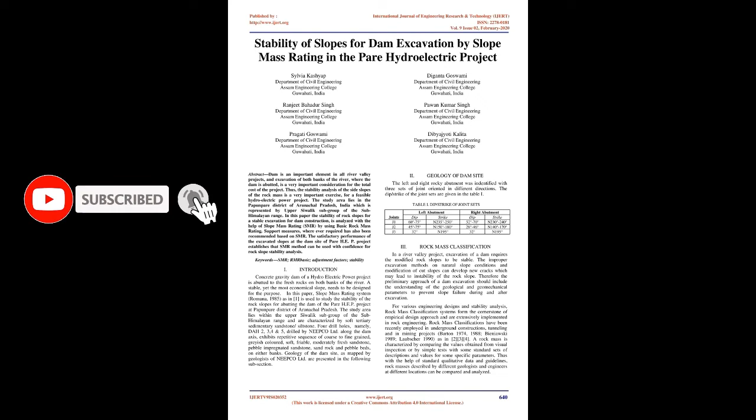Introduction. Concrete gravity dam of a hydroelectric power project is abutted to the fresh rocks on both banks of the river. A stable, yet the most economical slope, needs to be designed for the purpose. In this paper, Slope Mass Rating System, Romana, 1985, as in 1, is used to study the stability of the rock slopes for abutting the dam of the Pare HEP project at Papumpare district of Arunachal Pradesh.

The study area lies within the Upper Siwalik subgroup of the Sub-Himalayan range and is characterized by soft tertiary sedimentary sandstone/siltstone. 4 drill holes, namely 2, 3, 4 and 5, drilled by NEEPCO Limited along the dam axis, exhibit repetitive sequence of coarse to fine-grained, grayish-colored, soft, friable, moderately fresh sandstone, pebble-impregnated sandstone, sand rock and pebble beds, on either banks. Geology of the dam site, as mapped by geologists of NEEPCO Limited, is presented in the following subsection.

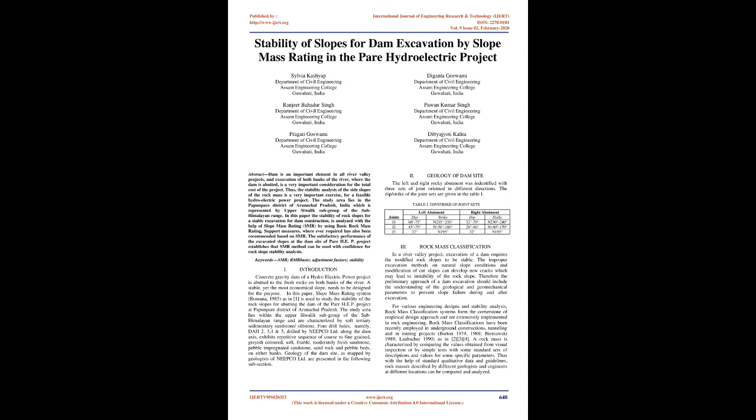2. Geology of dam site. The left and right rocky abutment was identified with 3 sets of joints oriented in different directions. The dip/strike of the joint sets are given in Table I. Table I: dip/strike of joint sets. Left abutment. Right abutment.

3. Rock mass classification. In a river valley project, excavation of a dam requires the modified rock slopes to be stable. The improper excavation methods on natural slope conditions and modification of cut slopes can develop new cracks which may lead to instability of the rock slope. Therefore, the preliminary approach of a dam excavation should include the understanding of the geological and geomechanical parameters to prevent slope failure during and after excavation.

For various engineering designs and stability analysis, rock mass classification systems form the cornerstone of empirical design approach and are extensively implemented in rock engineering. Rock mass classifications have been recently employed in underground constructions, tunneling and in mining projects. Barton 1974, 1988, Bieniawski 1989, Laubscher 1990, as in 2, 3, 4.

A rock mass is characterized by comparing the values obtained from visual inspection or by simple tests with some standard sets of descriptions and values for some specific parameters. Thus, with the help of standard qualitative data and guidelines, rock masses described by different geologists and engineers at different locations can be compared and analyzed.

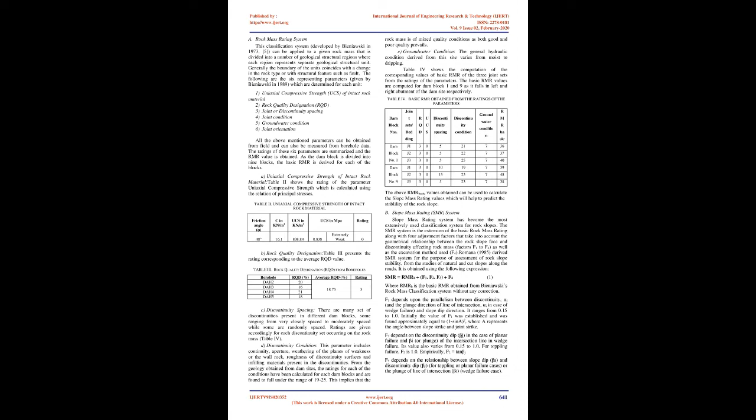1. Uniaxial compressive strength, UCS, of intact rock material. 2. Rock quality designation, RQD. 3. Joint or discontinuity spacing. 4. Joint condition. 5. Groundwater condition. 6. Joint orientation. All the above mentioned parameters can be obtained from field and can also be measured from borehole data. The ratings of these 6 parameters are summarized and the RMR value is obtained. As the dam block is divided into 9 blocks, the basic RMR is derived for each of the blocks.

A. Uniaxial compressive strength of intact rock material. Table 2 shows the rating of the parameter uniaxial compressive strength, which is calculated using the relation of principal stresses. C. Discontinuity spacing. There are many sets of discontinuities present in different dam blocks, some ranging from very closely spaced to moderately spaced while some are randomly spaced. Ratings are given accordingly for each discontinuity set occurring on the rock mass, Table 4.

D. Discontinuity condition. This parameter includes continuity, aperture, weathering of the planes of weakness or the wall rock, roughness of discontinuity surfaces and infilling materials present in the discontinuities. From the geology obtained from dam sites, the ratings for each of the conditions have been calculated for each dam block and are found to fall under the range of 19 to 25.

This implies that the rock mass is of mixed quality conditions, as both good and poor quality prevails. E. Groundwater condition. The general hydraulic condition derived from this site varies from moist to dripping.

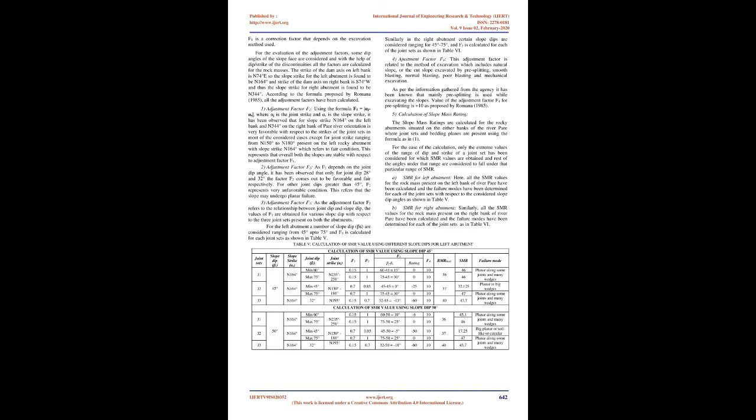Romana, 1985, derived SMR system for the purpose of assessment of rock slope stability, from the studies of natural and cut slopes along the roads. It is obtained using the following expression. SMR equals RMRB plus (F1 × F2 × F3) plus F4, (1). Where RMRB is the basic RMR obtained from Bieniawski's rock mass classification system without any correction.

F1 depends upon the parallelism between discontinuity, αj, and the plunge direction of line of intersection, αi in case of wedge failure, and slope dip direction. It ranges from 0.15 to 1.0. Initially the value of F1 was established and was found approximately equal to (1 − sin A)², where A represents the angle between slope strike and joint strike.

F2 depends on the discontinuity dip, βj, in the case of planar failure, and βi, or plunge, of the intersection line in wedge failure. Its value also varies from 0.15 to 1.0. For toppling failure, F2 is 1.0. Empirically, F2 equals tan² βj. F3 depends on the relationship between slope dip, βs, and discontinuity dip, βj, for toppling or planar failure cases, or the plunge of line of intersection, βi, wedge failure case.

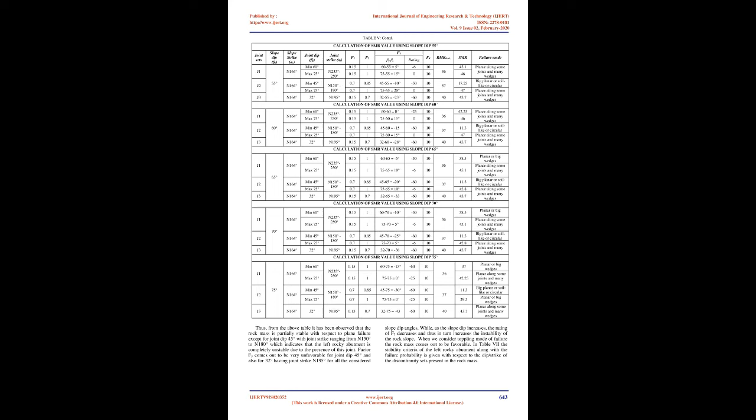1. Adjustment factor F1, using the formula F1 equals αj − αs, where αj is the joint strike and αs is the slope strike, it has been observed that for slope strike north 164 degrees on the left bank and north 344 degrees on the right bank of Pare River, orientation is very favorable with respect to the strikes of the joint sets in most of the considered cases, except for joint strike ranging from north 150 degrees to north 180 degrees present on the left rocky abutment, with slope strike north 164 degrees, which refers to fair condition. This represents that overall both the slopes are stable with respect to adjustment factor F1.

2. Adjustment factor F2, as F2 depends on the joint dip angle, it has been observed that only for joint dip 28 degrees and 32 degrees the factor F2 comes out to be favorable and fair respectively. For other joint dips greater than 45 degrees, F2 represents very unfavorable condition. This refers that the slope may undergo planar failure.

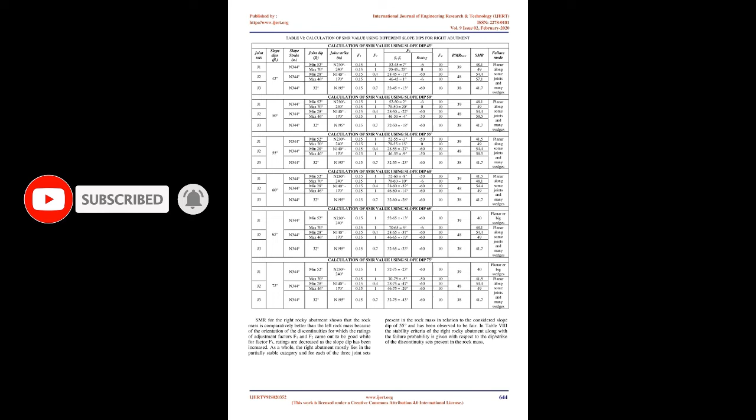3. Adjustment factor F3, as the adjustment factor F3 refers to the relationship between joint dip and slope dip, the values of F3 are obtained for various slope dip with respect to the three joint sets present on both the abutments. For the left abutment, a number of slope dip, βs, are considered ranging from 45 degrees up to 75 degrees, and F3 is calculated for each joint sets as shown in Table V. Similarly, in the right abutment certain slope dips are considered ranging from 45 degrees to 75 degrees, and F3 is calculated for each of the joint sets as shown in Table 6.

4. Adjustment factor F4, this adjustment factor is related to the method of excavation, which includes natural slope, or the cut slope excavated by pre-splitting, smooth blasting, normal blasting, poor blasting and mechanical excavation. As per the information gathered from the agency, it has been known that mainly pre-splitting is used while excavating the slopes. Value of the adjustment factor F4 for pre-splitting is plus 10 as proposed by Romana, 1985. 5. Calculation of slope mass rating.

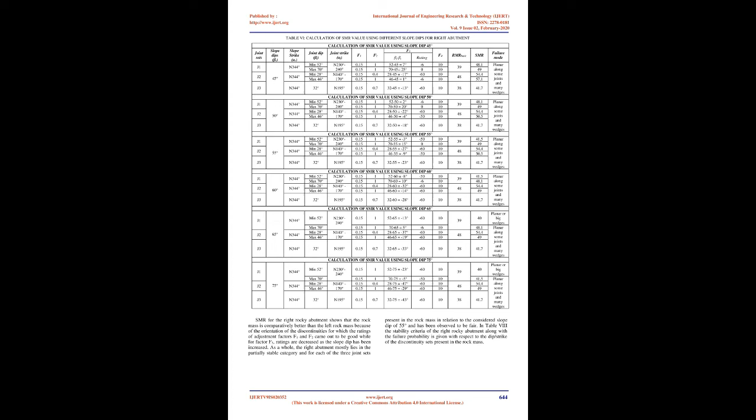The slope mass ratings are calculated for the rocky abutments situated on either bank of the River Pare where joint sets and bedding planes are present, using the formula as in 1. For ease of calculation, only the extreme values of the range of dip and strike of a joint set have been considered, for which SMR values are obtained, and the rest of the angles under that range are considered to fall under that particular range of SMR.

A. SMR for left abutment. Here, all the SMR values for the rock mass present on the left bank of River Pare have been calculated, and the failure modes have been determined for each of the joint sets with respect to the considered slope dip angles as shown in Table V. B. SMR for right abutment. Similarly, all the SMR values for the rock mass present on the right bank of River Pare have been calculated, and the failure modes have been determined for each of the joint sets as in Table 6.

Thus, from the above table it has been observed that the rock mass is partially stable with respect to plane failure except for joint dip 45 degrees with joint strike ranging from north 150 degrees to north 180 degrees, which indicates that the left rocky abutment is completely unstable due to the presence of this joint. Factor F3 comes out to be very unfavorable for joint dip 45 degrees and also for 32 degrees, having joint strike north 195 degrees for all the considered slope dip angles. As the slope dip increases, the rating of F3 decreases and in turn increases the instability of the rock slope. When we consider toppling mode of failure, the rock mass comes out to be favorable.

In Table 7 the stability criteria of the left rocky abutment along with the failure probability is given with respect to the dip/strike of the discontinuity sets present in the rock mass. SMR for the right rocky abutment shows that the rock mass is comparatively better than the left rock mass because of the orientation of the discontinuities, for which the ratings of adjustment factors F1 and F2 came out to be good, while for factor F3, ratings are decreased as the slope dip has been increased.

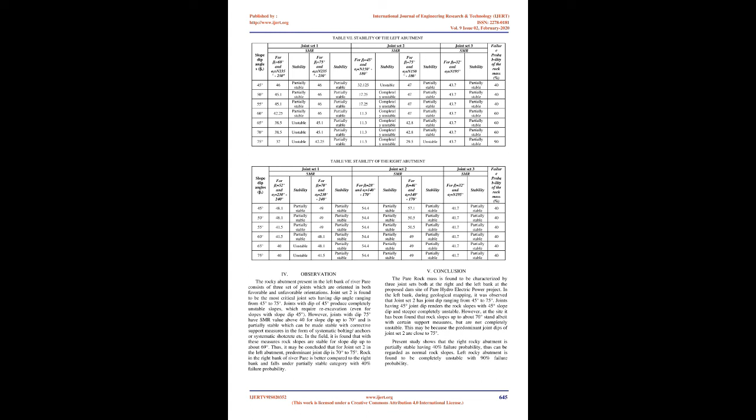Observation. The rocky abutment present in the left bank of River Pare consists of three sets of joints which are oriented in both favorable and unfavorable orientations. Joint set 2 is found to be the most critical joint set, having dip angle ranging from 45 degrees to 75 degrees. Joints with dip of 45 degrees produce completely unstable slopes, which require re-excavation, even for slopes with slope dip 45 degrees. However, joints with dip 75 degrees have SMR value above 40 for slope dip up to 70 degrees and are partially stable, which can be made stable with corrective support measures in the form of systematic bolting/anchors or systematic shotcrete, etc. In the field, it is found that with these measures rock slopes are stable for slope dip up to about 69 degrees.

Thus, it may be concluded that for joint set 2 in the left abutment, predominant joint dip is 70 degrees to 75 degrees. Rock in the right bank of River Pare is better compared to the left bank and falls under partially stable category with 40% failure probability.

Conclusion. The Pare rock mass is found to be characterized by three joint sets both at the right and the left bank at the proposed dam site of Pare Hydroelectric Power Project. In the left bank, during geological mapping, it was observed that joint set 2 has joint dip ranging from 45 degrees to 75 degrees. Joints having 45 degrees joint dip render rock slopes with 45 degrees slope dip and steeper completely unstable. However, at the site it has been found that rock slopes up to about 70 degrees stand, albeit with certain support measures, but are not completely unstable. This may be because the predominant joint dips of joint set 2 are close to 75 degrees.